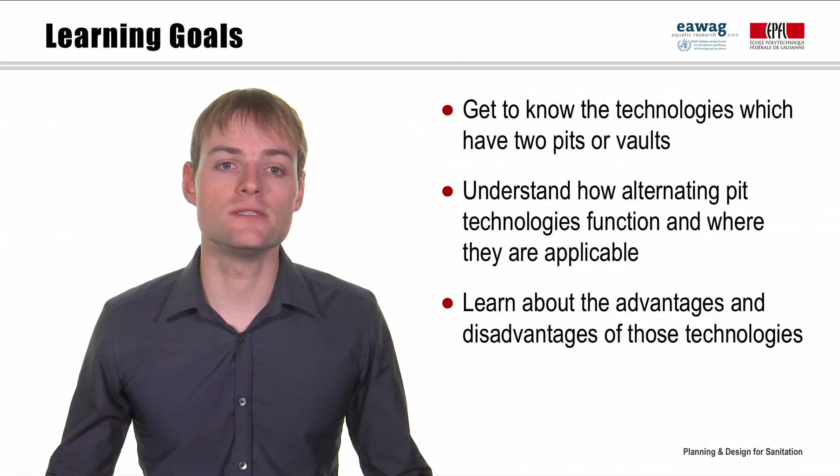In the second module, on collection and storage, we will look at 4 different technologies which are based on double pits or double vaults. I will explain why it can make sense to install 2 pits and use them alternatingly, and in which situation those 4 technologies are most appropriate. Like everything in life, these technologies also have their advantages and disadvantages. You will learn about them in the next few minutes.

Let's start with something that we are familiar with already. The Ventilated Improved Pit, or VIP. What you can see here is basically the same as the single VIP we already know, just with the second pit added next to it. That's why we call this technology the double VIP. Its use is very similar to the single VIP, but when one pit is full, it is not immediately emptied. Rather, the full pit is closed and the superstructure moved to the other one.

While the second pit fills, the content of the first one is allowed to rest, drain and naturally decompose, until both pits are full. Only then the first pit is emptied and used again. This cycle can go on indefinitely. Each pit should be designed to accommodate the excreta of 1 to 2 years. During that time, the material in the resting pit becomes partially sanitized and humus-like. We therefore call it pit humus. The humus is a solid product which cannot be pumped and needs to be excavated manually using a shovel.

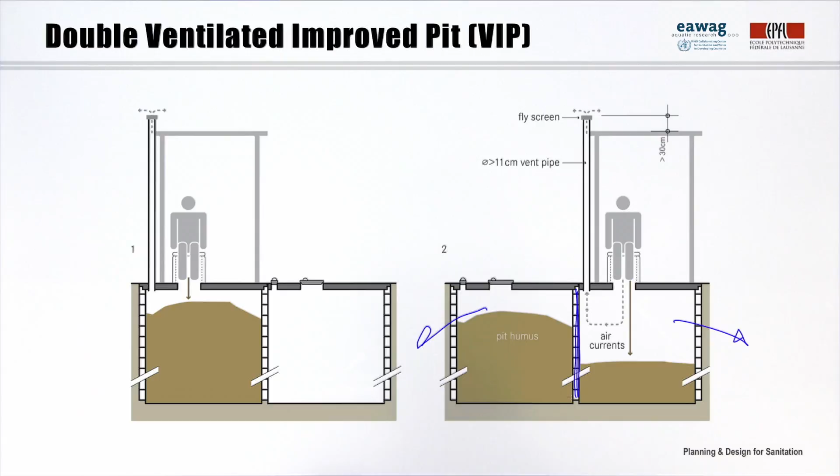An advantage of the double VIP is that the pits are permanent and designed for constant operation. With proper maintenance, double pits can have an indefinite service life. Emptying is easier and safer than fecal sludge, because the resulting pit humus is solid, much less offensive, and has a significantly reduced pathogen content. The product may even be used to improve the water and nutrient retaining properties of agricultural soils.

As in VIPs, the contamination of groundwater resources is still possible with this technology, and double VIPs are not suitable for rocky ground or areas that are prone to flooding. Because of the product being solid, manual emptying is required. This can be done by the users themselves, which reduces the operating costs and does not require accessibility by vacuum trucks. However, the upfront investment costs for double pits are obviously higher than for single pits.

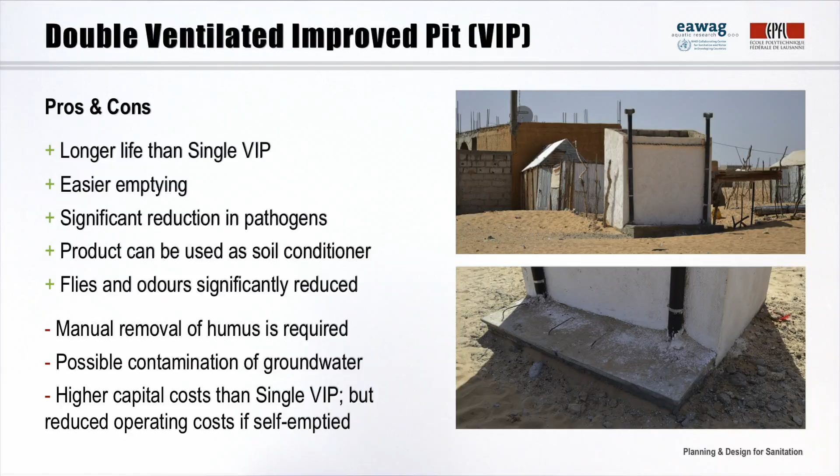The so-called Fossa Alterna is very similar to the double VIP. Compared to the double VIP, however, which is basically just designed to collect, store, and partially treat excreta, the Fossa Alterna is actually designed to make a higher quality, earth-like product that can be used as a valuable soil conditioner. This is achieved by adding soil, ash or leaves as cover material after each defecation, which absorbs the liquids inside the pit and increases the pore space, allowing for aerobic conditions. The cover material also reduces smells and introduces a variety of microorganisms which help in the degradation process.

The pits are dug to a maximum depth of 1.5 meters and therefore often do not require a lining on the entire side walls, allowing for soil organisms to enter and do their job. Like in the double VIP, the full pit degrades while the second pit is filling, which ideally should take 1 year. Because of the added carbon-rich bulking material, the degradation process is accelerated and the content is ready for excavation and use much faster than in a double VIP. Grey water should not be added because it fills the pore spaces and deprives the aerobic bacteria of the oxygen that is required for degradation.

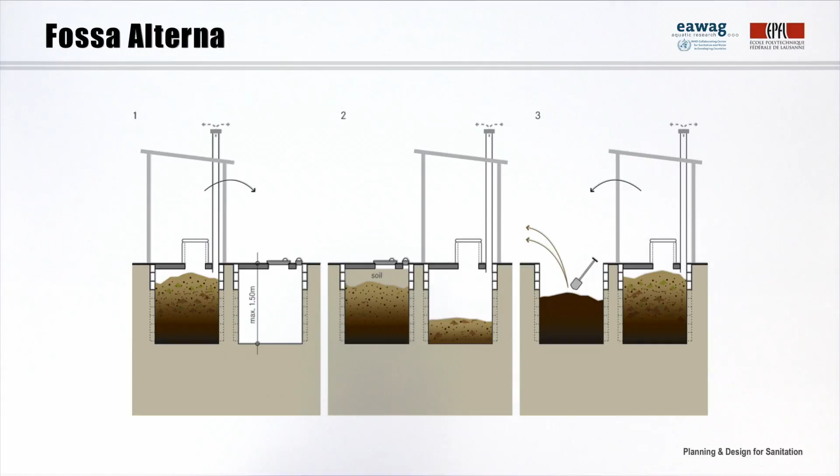The advantages and disadvantages of the Fossa Alterna are slightly different to the ones of the double VIP. Emptying is still done manually using a shovel, but may be even easier because of the cover material, which gives the humus a less compact, more aerated form. Important to note is that soil, ash or leaves should be constantly available to generate the desired nutrient-rich, compost-like product. Separate solid waste and greywater management are crucial to ensure a high-quality product.

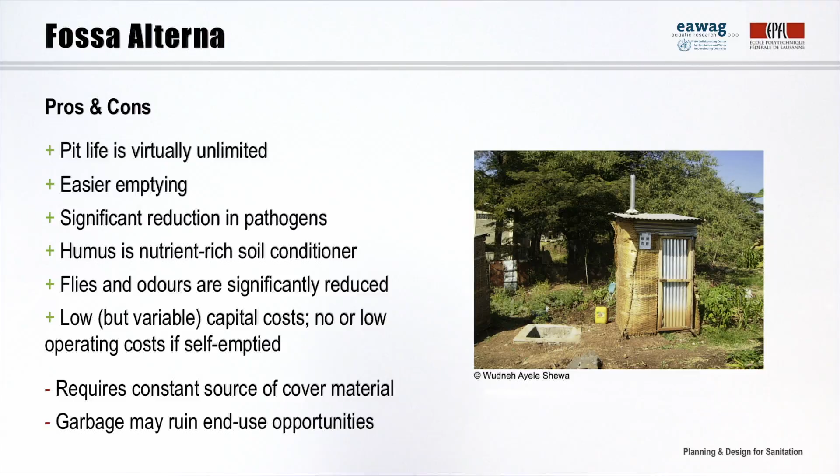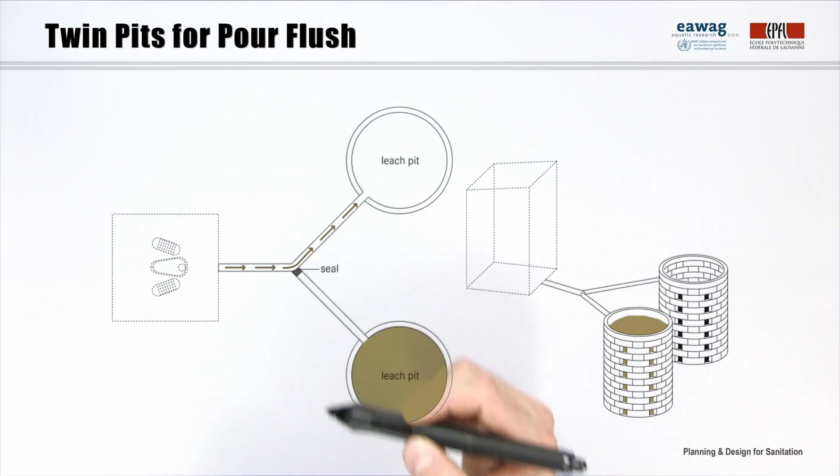Twin pits for pour flush, sometimes called double leach pits, are designed to receive black water as input and possibly also greywater. As you can see on the drawing, the pour flush toilet is used as user interface and connected to one of the pits by a pipe. The other pipe is properly sealed, for example using cement and bricks. Alternatively, it is also possible to use a single straight pipe fixed with light mortar and covered with earth.

The black water is collected in the pit and allowed to slowly infiltrate into the surrounding soil. As liquid leaches from the pit and migrates through the unsaturated soil matrix, pathogenic germs are sorbed onto the soil surface. In this way, pathogens can be removed prior to contact with groundwater.

Like in the previous technologies, when the pit becomes full, it is closed and allowed to rest before being emptied. As this is a water-based wet technology, the full pits require a longer retention time of 2 years to degrade the material. Over time, the content is sufficiently dewatered and can be safely excavated in the form of pit humus, again manually with a shovel.

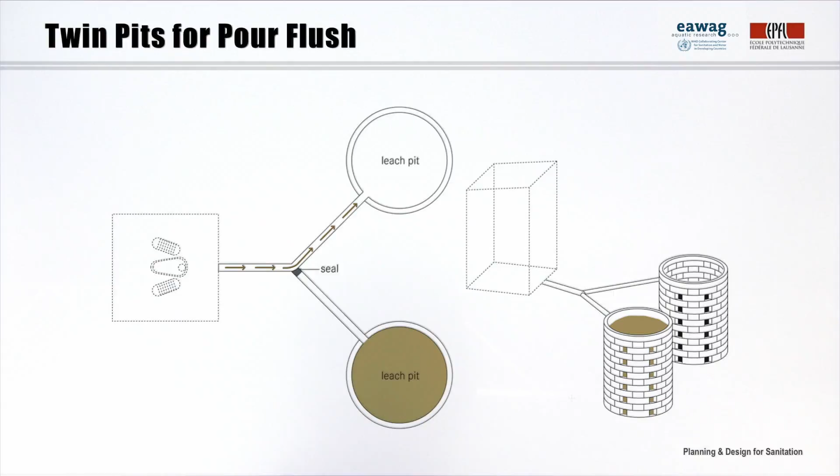It is recommended that the twin pits be constructed 1 meter apart from each other to minimize cross-contamination between the maturing pit and the one in use. Water within the pit can impact its stability. Therefore, the full depth of the pit walls should be lined to prevent collapse. As you can see in the drawing on the right, numerous openings in the pit lining facilitate the leaching.

Twin pits also have a few specific advantages and disadvantages. Compared to the previous options, flies and odors are further reduced due to the use of the pour flush latrine. Because this is a water-based technology, the soil must have a good infiltration capacity. Clay, tightly packed or rocky soils are not appropriate.

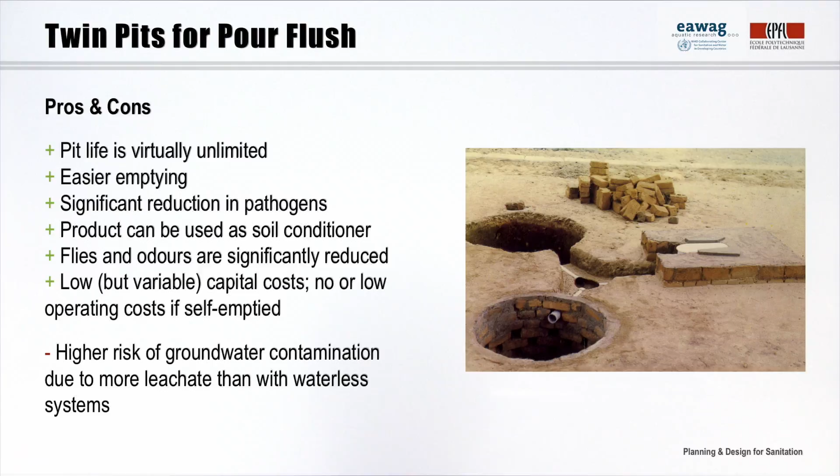This technology is not suitable for areas with a high groundwater table or where there is frequent flooding. There is a risk of groundwater pollution when pits are located in areas with a high or variable water table. As a rule of thumb, it can be recommended to have a minimum horizontal distance of 30 meters between the pits and the water source to limit exposing the water source to microbial contamination.

Dehydration vaults are watertight alternating chambers that are usually built above the ground to collect, store, and dry feces. One chamber is in use, while the other one dehydrates. When feces are not mixed with urine and other liquids, they dry quickly. In the absence of moisture, organisms cannot grow, pathogens are destroyed, and smells minimized.

This technology requires the use of the UDDT as a user interface. Urine is diverted, flows through a hose or pipe, and is collected in a storage tank. What enters the dehydration vaults is only feces, and possibly dry cleansing materials.

To prevent flies, minimize odors, and encourage drying, a small amount of ash, lime, dry soil, or sawdust should be used to cover feces after each use. Ash and lime additionally raise the pH, which causes pathogens to die off. A vent pipe is required to remove humidity from the vaults and control flies and odors.

The World Health Organization recommends a minimum storage time of 6 months if ash or lime are used as cover material. Otherwise, the storage should be 1 to 2 years, depending on the climate. Each vault is therefore sized to accommodate at least 6 months of feces accumulation.

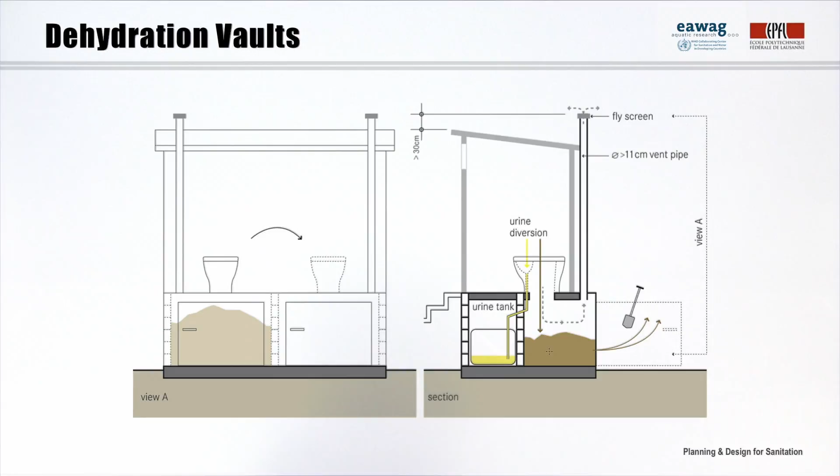After the recommended storage time, the pathogens are significantly reduced and it is easy and safe to remove the dried material from the chamber using a shovel. The dehydrated feces can then be used as soil conditioner and the vault put back into service. As long as no liquids enter the chambers, this technology should be a comfortable and odor-free solution.

Dehydration vaults can be a clean and easy to use technology. It is crucial, however, that the users are well trained to understand how the technology works and appreciate its benefits.

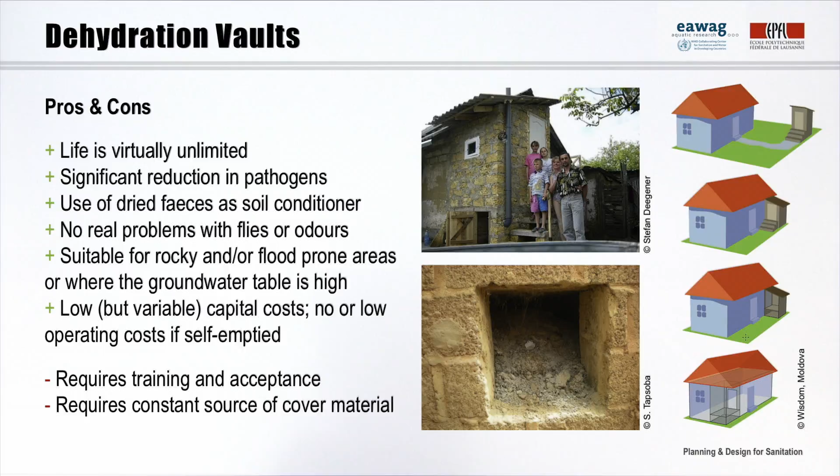In this module, we looked at 4 technologies which all have in common that they use storage and naturally occurring dewatering and degradation processes to produce a material that is safer and easier to handle than fecal sludge. The products from these technologies can even be used as soil conditioners. Due to the material being solid, it is not possible to mechanically empty it using a pump. It needs to be dug out manually.

This may be seen as a disadvantage, but also as an advantage, especially in areas where mechanical emptying is expensive or impossible due to difficult access. All the double pit technologies shown are permanent and can be constantly used if well maintained. Therefore, they are particularly suited to peri-urban or urban areas where it is not possible to dig a new pit when the old one is full.

On the other hand, the potential risk to groundwater sources due to leaching limits the applicability of these double pit technologies in urban areas. In the next module, we are going to look at anaerobic technologies for collection and storage.